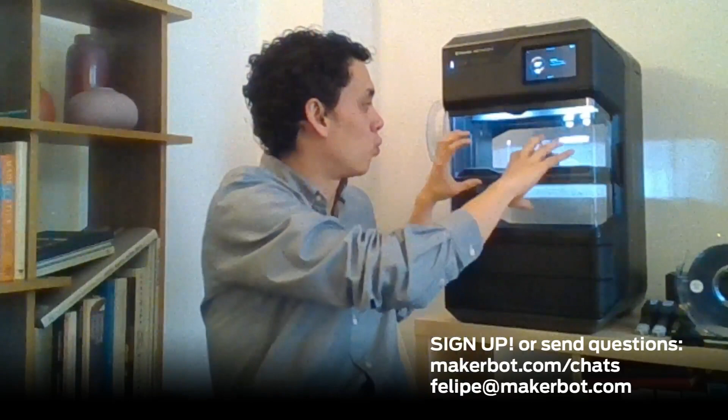It's important to know that even if you have a heated build plate, if you don't have a heated chamber, it's going to be hard to print with some of these higher temperature materials because they will start peeling up even after. With a heated build plate, once you get a certain distance away from it, you start losing that benefit. And with the chamber, you're actually controlling the whole print environment, right? So I'm not only focusing the temperature here, but I'm able to print with a consistent temperature in every single layer, not just the first couple of them.

So for PCABS, the print settings are as follows, right? You will need to have 85 degrees in the print chamber, so hence you need the Method X to print that. And it's going to use SR30 as support. So here I have another part. It's actually a car door handle. This was printed horizontally like that. And as you can see, both the raft and the supports. The supports are, as you guys know, the structure that's created to support, hence the name, the actual print structure, right?

So we have PCABS and PCABS FR. Let me jump here into a new slide. Both will use SR30 as supports, right? It's going to be available right now only in black. But it's a really interesting material, right? We've heard that it's being used a lot for automotive industries.

That's why some of the sample parts that we have, let me move to the side a little bit, are basically that, right? In this case, the car handle. I also have right here a halfway printed train car holder. So in Europe, they use this a lot as replacement parts.

So directly to replace, instead of having a small batch of these, like the hand holders that you get grabbing to the subway, not so much nowadays, but when you're trying to replace some of those components in the transportation industry, it's really hard. It can be really expensive to submit an order. So let's say that you're trying to replace 5 or 10, it's just better to print a few as opposed to having to put an order for 100 or 1,000 pieces.

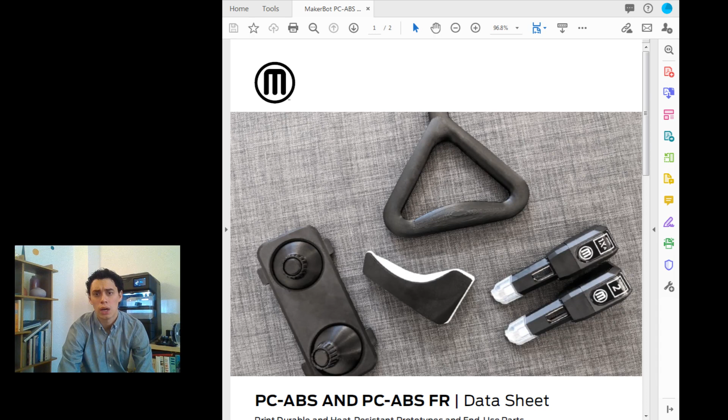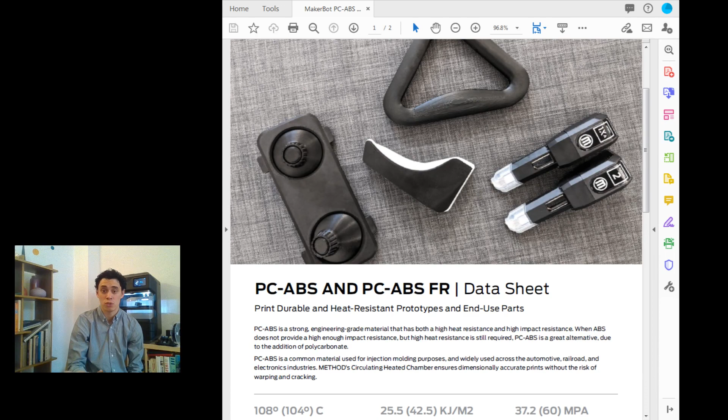So PCABS and PCABS-FR. FR stands for flame retardant. That's one of the reasons why it's widely used. It's widely used in the automotive industry and also in many train and railroad applications because of the compliance that they need. When they are substituting any one of these components, they need to make sure that if anything happens to them, they will withstand a certain temperature, or worst case scenario, they will not emit particularly harsh fumes if they are ignited.

So overall, the withstanding temperature starts at 100 degrees C. That's pretty hot. That's one of the reasons also why you need to have the chamber temperature so high up. So as I said before, you need to print it at 85 C, which is pretty darn hot. It's almost boiling temperature, right? It's pretty strong. I think it's fairly comparable to ABS.

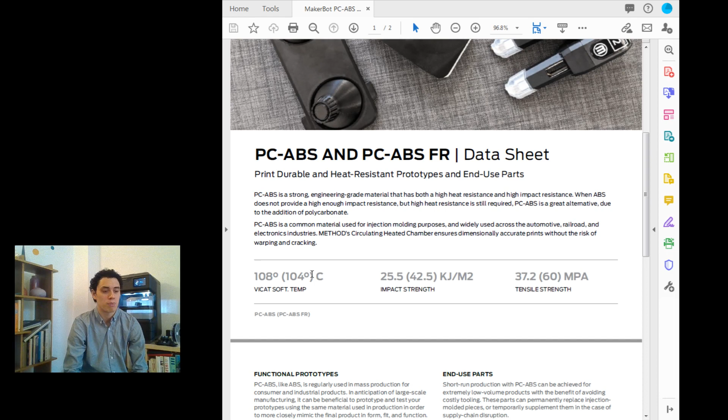And specifically regarding the applications, we've seen it used a lot for functional prototypes. We know other manufacturers that actually supply these. Also as end-use parts, kind of what I was showcasing here with the train handle, where you are going to swap one-to-one the part that's defective or the part that broke down. Let's say that you have this handle in a subway car, and then you just print a new one because the old one broke down, wore off, or whatever.

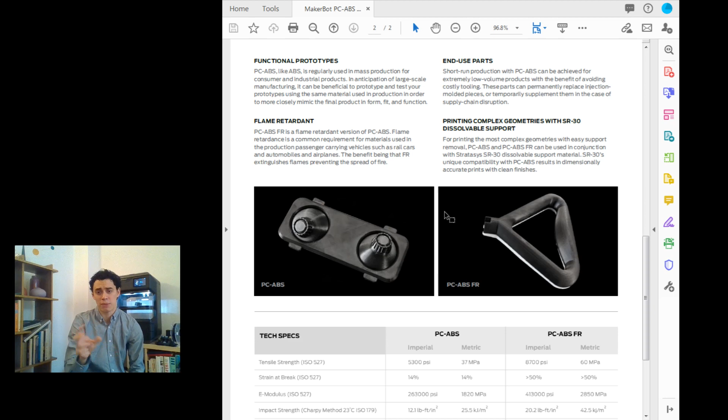One of the versions is flame retardant, which is just to say that it'll both prevent the spread of fire and comply with certain guidances that we have, depending on where you live, that might change. So we can look at that in detail in a second. And it's also able to print fairly complex geometry, specifically using SR30. I'll get to that in a second.

But I was talking about these specific parts. So the part on the right, this handle, no matter how you print it, you will need supports, right? And some of these more advanced materials won't print with any other support.

So you might end up needing to use breakaway supports if you don't have a dual filament system. With Method, you're able to use SR30, which is great because once it's done, that white outline, I don't know if you can see it here. Yeah, you can see my mouse. So this white outline is going to basically get dissolved, which is what happened in this part,

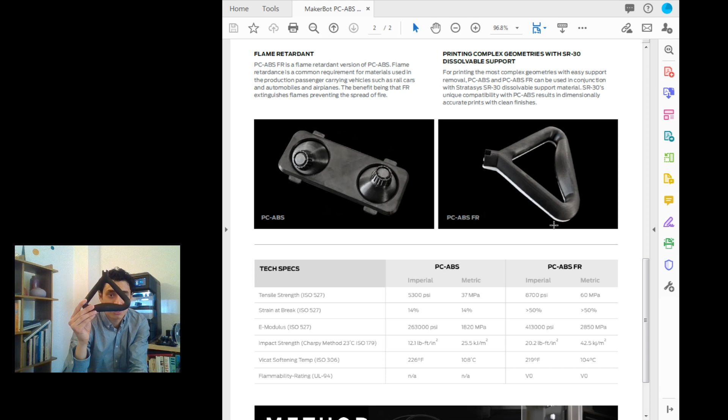after the printing process is done, right? So you're able to print the part in any orientation, depending on whether you're optimizing for a specific strength or a specific layer alignment, have the supports be generated, and after the fact, just remove the supports and get your finished part without any hassle, really.

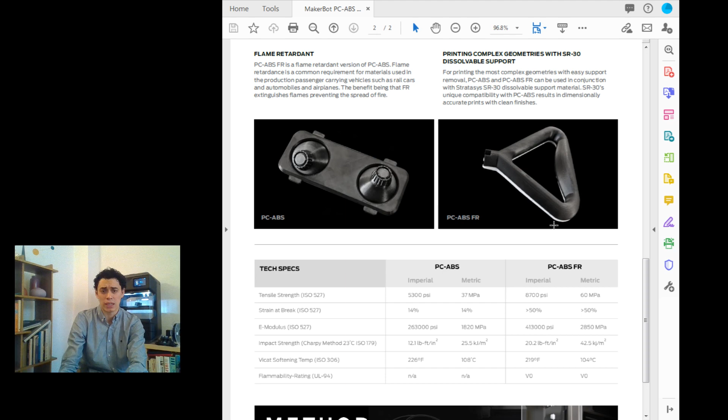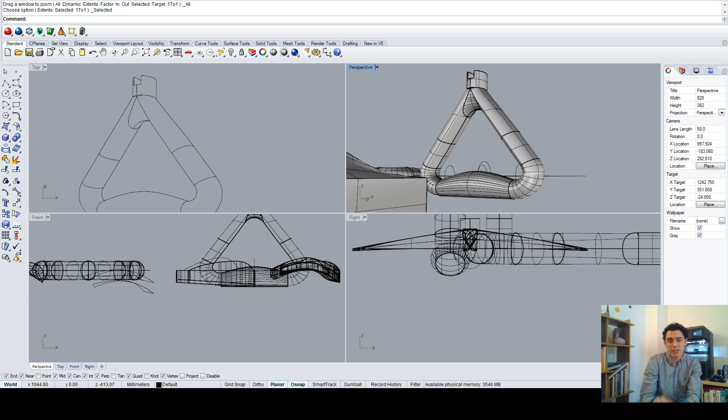My Rhino window. I love Rhino. Some people call me old school because of that. I generally use either Rhino or SolidWorks. I'm also well versed in other Autodesk features and materials. But for this one, I chose to use Rhino, and specifically, let me expand this. So this is how I generated this specific train card holder, right?

It's a very smooth surface, so let me just focus in here. Everything is rounded off, which means that no matter how you orient this part, it's always going to require supports, right? You can either orient it vertically, or you can orient it horizontally, which is the way that I've been printing it so far. And the thing that is going to change with your part orientation is mainly the layer lines, and in some geometries, it can affect the performance of the part, right?

We'll talk about that in future episodes, but just how do layer lines correlate with part strength? The nature of 3D printing creates, I think it's called anisotropic materials, which means they don't necessarily have the same strength in every single axis. It's way stronger when you have the heated chamber, right? Because it actually allows for that change in strength on the vertical axis to dissipate because you're constantly heating up the material, but it will definitely change the way that the material performs depending on the part orientation.

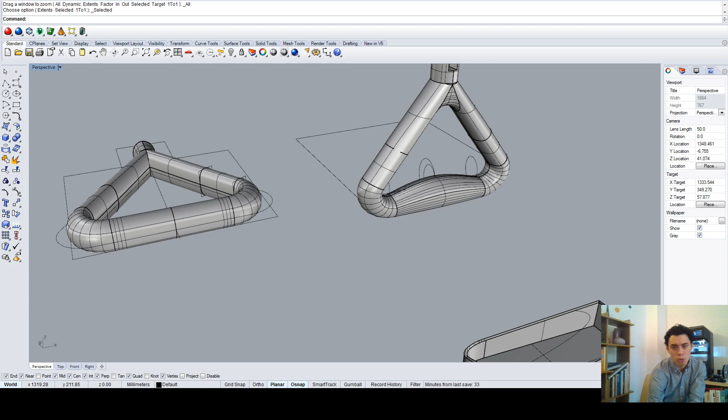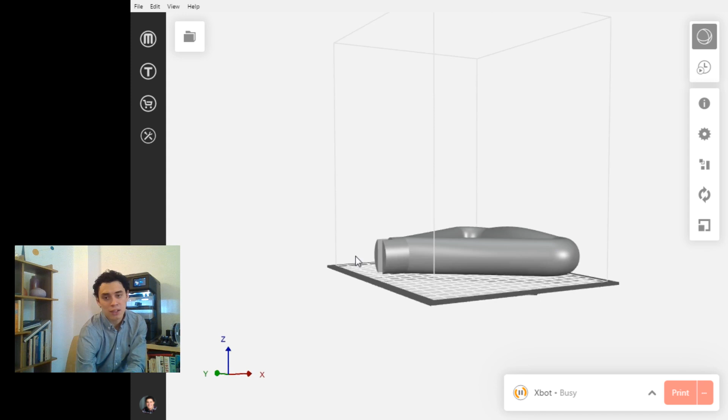So let's say that you're done with this part, right? You've already finished smoothing it out. You see how it's already looking pretty legit, pretty straightforward of a part. Then the next step would be to actually export and bring it over to MakerBot Print. We have many plugins available for you guys to use, whether you're using SolidWorks or Autodesk Fusion 360, that will directly send the part over to MakerBot Print. And once you have it in MakerBot Print, you can do a similar exercise to what we just did in Rhino, right? So it's a very straightforward process.

In this case, let me change this for a second. So I'm going to select a different printer because the one that I'm currently using here is busy. But I've got a different Method X, right? And the first thing that you will notice is that there's a little square floating around the part itself. That square is what we call the purge tower. The purge tower is the material that's going to be deposited as an extra element for the part in order for the nozzles to clean themselves up, right?

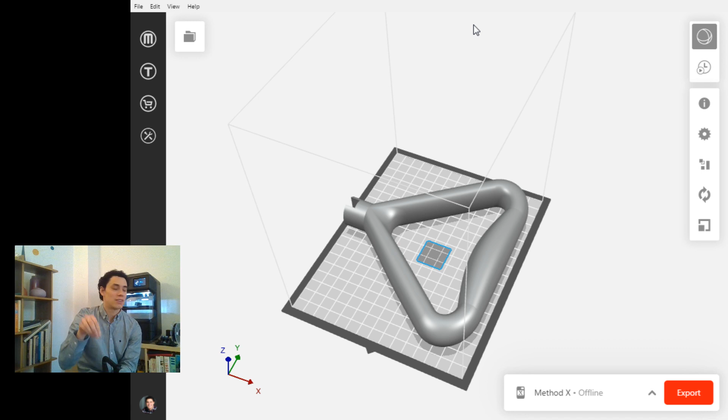So when you're printing with two different materials, you need to swap between nozzle 1 and nozzle 2 constantly. In order to avoid any sort of stringing, any sort of defects with the part, the machine itself is going to print a little tower close to that part in order to clean itself. It's kind of like a purging area that it'll visit every time that it toggles between nozzles in order to avoid any sort of contamination between the two materials.

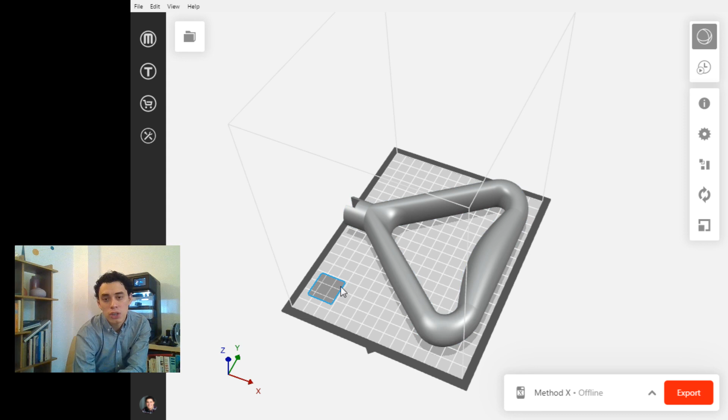So that part, that little square represents that purge tower. You can move it around and orient it any way you want. And as I was saying, the part is also something that you can change and orient in any way you want, right? It could be a vertical orientation. It could be a horizontal orientation like what we have.

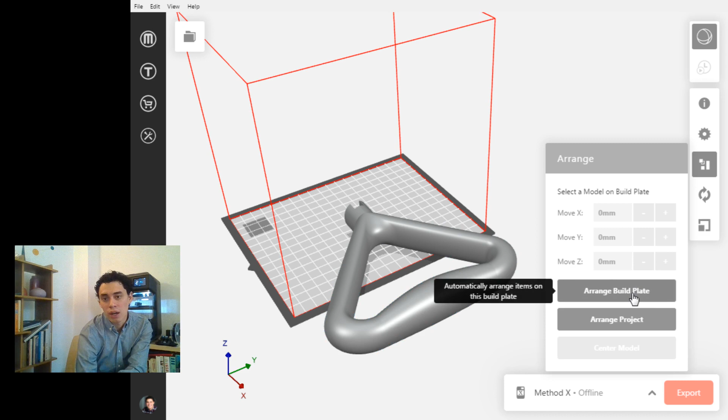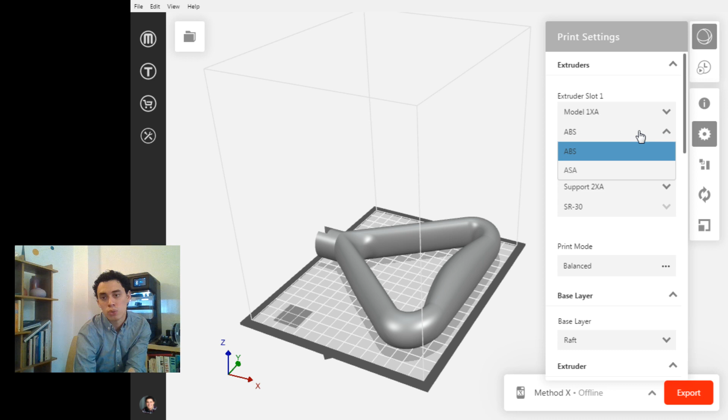It's also easy: here I can go and arrange build plate and it'll automatically fit the part to the build plate and make sure that it actually is aligned to the best orientation that I might want to use. And then you can either directly export the part if you're ready, or visit the settings. Right now I have only ABS and SR30 here. So you just change the material here to be ASA, and in this case, that will require SR30 support, so there's nothing to do there.

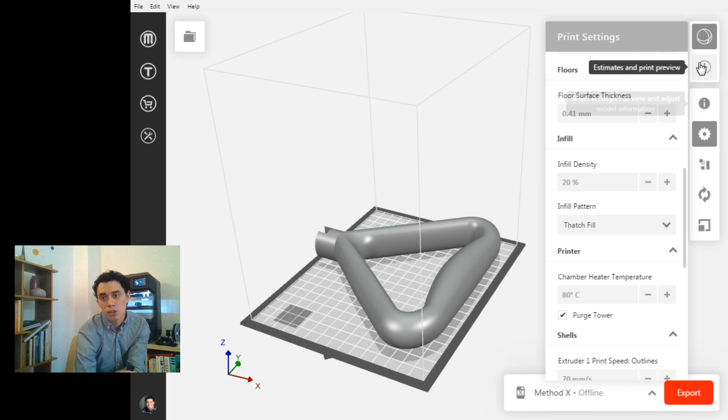Change the print mode, maybe select whether you want a raft or not, the different temperature settings, which as I said before, as soon as you select PC-ABS, this will default to 80C, and you can directly export that file, or the better way to do it, I would say, is to get a preview. Why would you want to get a preview? Because that can actually change or challenge a little bit your part orientation.

So what MakerBot Print is doing right now is actually generating the whole tool pathing document, so the slices, right, that this file is going to be split into, in order for me to know how this part is going to look, how the supports are going to be generated.

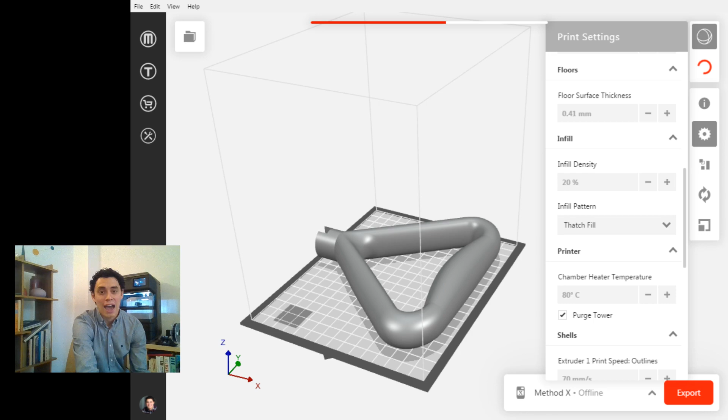I'll let it finish for a second, and in the meantime, I'll show you guys this part, already printed out. So I stopped the part halfway through, just to show you guys the infill settings that we're using. In this case, it's 20% infill with this linear lattice, very straightforward. And the part, as I was mentioning, was printed this way.

So once I finished printing, I actually just removed the supports down here, because as you can see, there's really no flat edge in the part, right? Because of this little bulge here, this rounded element, it's impossible for the part to sit flat against the surface. So because of that, I forced myself into having to use supports, right? Which is good and bad, right? In a way, you could design your way out of it. You could design a part that doesn't require supports.

For example, I have this other part. This is also polycarbonate. It's not ABS. It's just regular polycarbonate from Polymaker. The material is called PolyMax. But this part is just a little bracket that I printed out to hang stuff around in the house. So this goes against the door, and I can hang stuff.

But anyways, by designing a flat extruded part, even though it has these rounded elements, even though it has multiple geometries associated to it, I can print it without supports. And why would you do that? Well, basically you can save time, you can save a little bit of post-processing time, but with the soluble supports, you don't necessarily have to compromise on that, right? You can just print it with supports, and going back to this support generation animation, it's what's happening right now, right?

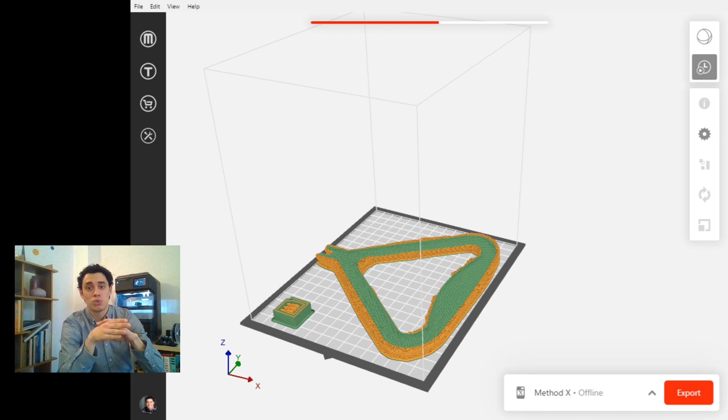So what you see happening here is MakerBot Print is detecting the areas that will need support. Those are highlighted in yellow or that orange color. And the green parts are the actual parts that will have the regular material, so in this case, the PC-ABS material that we will be printing with. Let's see if it finishes, but you can see how it slowly generates every single layer, and also gives you a preview of what's going to happen.

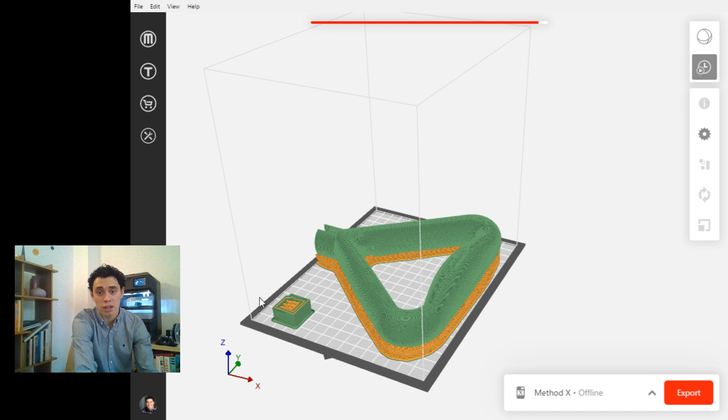You can see what I was talking about before here in the lower left, where it's generating that purge tower, right? And the purge tower, as you can see, also has two colors. So it's done. It's a 10-hour part, not too bad, ten and a half hours.

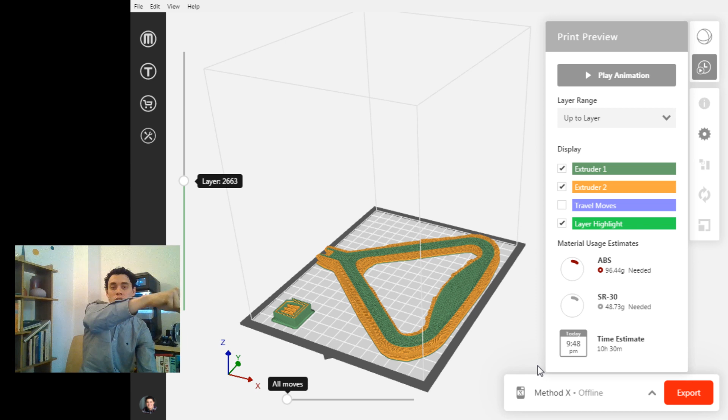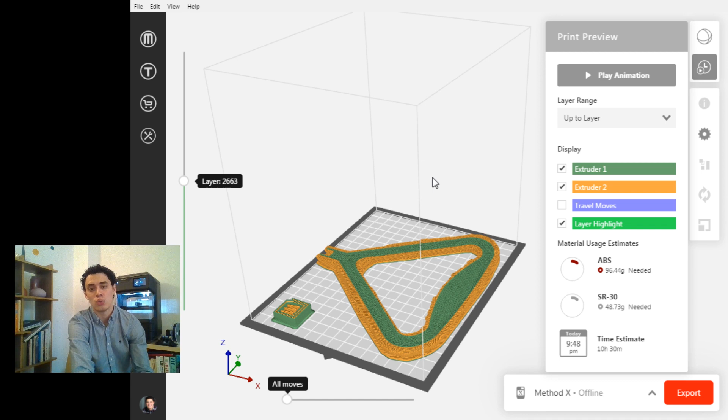Now you can also change the location of the purge tower, and that might affect the print time. Why? Because the nozzles will have to travel every single time to that purge tower in order to clean themselves up, right? So if you put it in a more central space, which is the way that I actually originally printed it out, if you put the tower here in the center, you're going to be able to simplify it a lot for the machine, because then it doesn't need to travel all the way to the outermost corner to clean itself up and then return to the model, right?

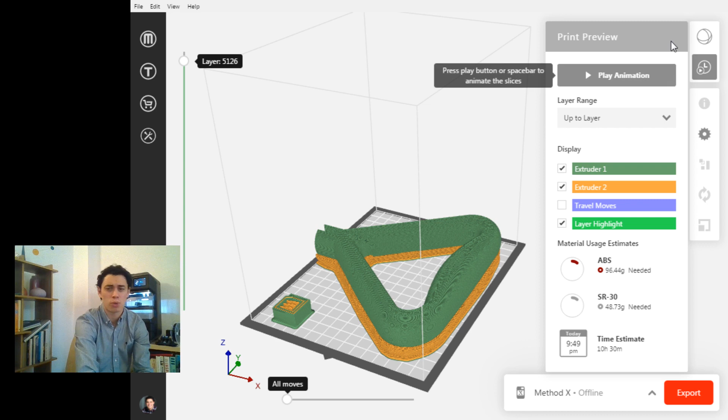And here, I just really like this toggle view where I can see layer by layer what the actual process is going to look like, if there are any issues with my part. Sometimes you have either issues with the mesh, or maybe you're seeing supports in an area where you didn't expect support. So this preview is a great way for you to look into that and have a first idea of how the part is going to be printed out.

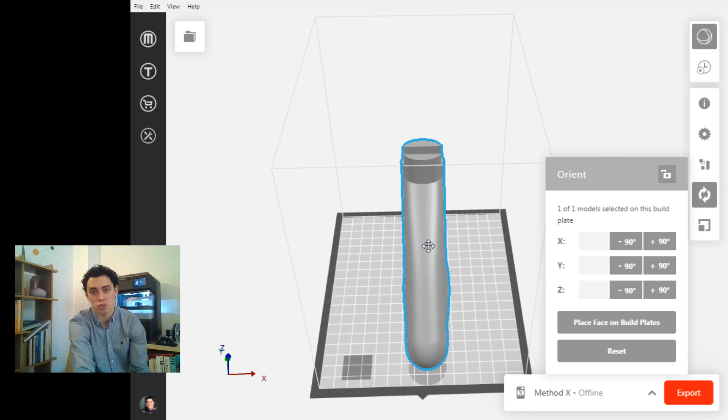And just for fun, while we talk about some other parts, I will change the orientation of this part and make it vertical. So just keep in mind, for the flat orientation, this part was going to take 10 hours to print. Let's compare that, let me arrange the build plate, and let's compare that with how much time it will take to print it vertically. Again, you can do it either way. You have both options, so I'll let it run for a few minutes.

But what we should expect, let me fade back here, now that I'm trying to print the part vertically, is that it's going to generate supports in all of this area. So most of this triangle is going to be filled up with supports. This is not ideal. It all depends on what you're trying to do, and you could always ask, would you want to print it this way or that way?

Strength-wise, it's going to be a similar result, but the differences in supports are going to be quite noticeable, because if I printed it this way, you can imagine how I will need to generate supports all the way through on the outside and also all the way through on the inside, because I have this large overhang here.

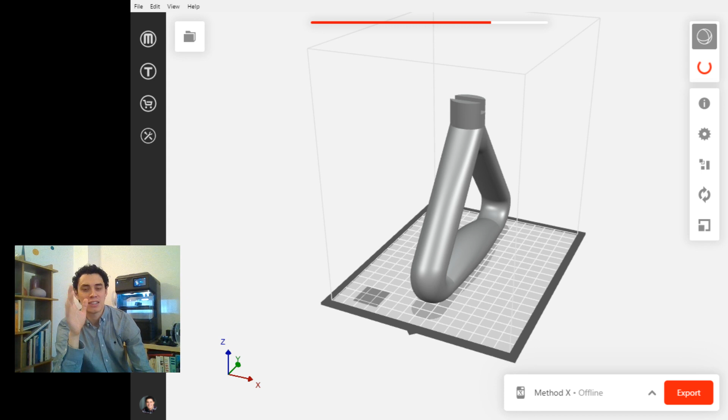So MakerBot Print is right now estimating the print time, the support needed and the material needed for this specific orientation. If I had to bet, this is probably going to be around 18 hours. But let's see. So flat, 10 hours, vertical, we'll come back to it in a second. In the meantime, let's talk a little bit more about some other parts that I have here.

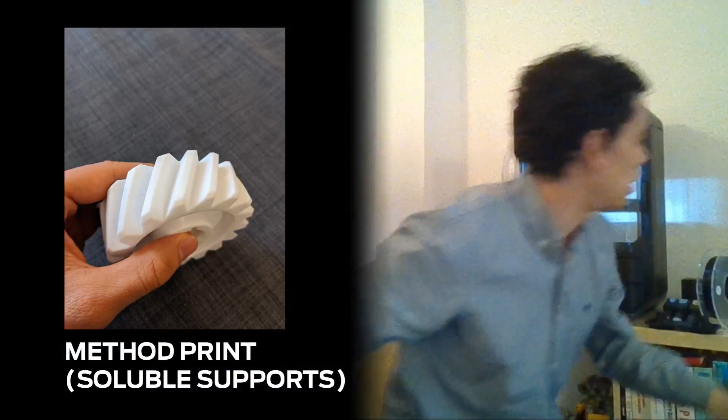So in this case, where did I leave that? It's right here. Another polycarbonate part that I printed before. We talked about this one last session, and it's a really interesting one because of the same need for strength. For this part, the same idea applies. Why would you print it vertically versus flat? If you print it flat, you require almost no support, unless you print it with this hollow area facing down.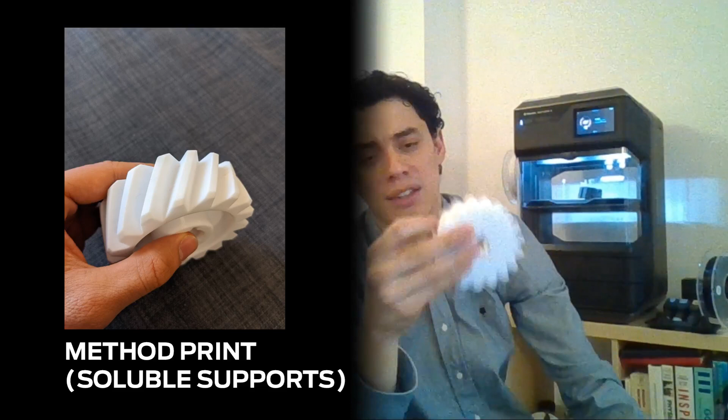But again, I think the big takeaway is that you have to consider two things as you're preparing your files to be printed out, the rule of thumb. What's the strength requirement? What's going to be the best orientation for your part to give you the best strength? And second, the time. Which orientation will generate more or less supports? And that's going to change quite a bit depending on the part, your expectations, and whether you have specific requirements in how the part is going to perform and behave.

So if I go back to this other polycarbonate part, this fan, let me just fade back to my webcam here. If I printed this part horizontally like that, facing sideways, two things would happen. First of all, I would get a lot of support generated, as opposed to when I printed it this way. When I printed it this way, it just generated support in the first couple of layers, basically just this section, and that was it. The whole top part sort of stands on itself.

If I print it sideways, all of this will require supports. Most of the fins, if you look face on, will require supports throughout. And not only that, but it'll also create layer lines in this direction, which is perpendicular to the forces that are going to be applied to this part.

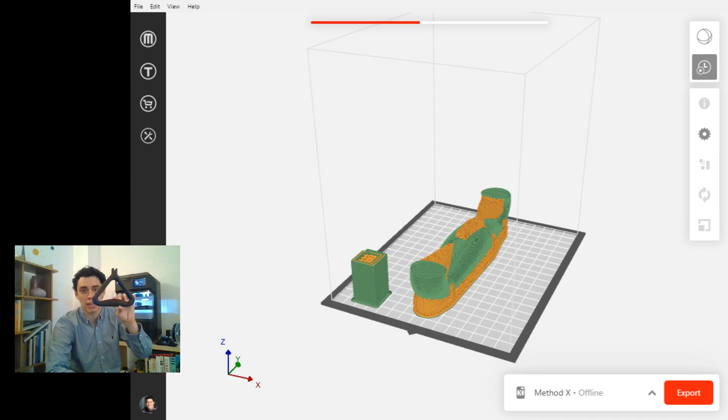So it's just something to keep in mind. Part orientation, very important for two reasons: material usage and part strength. Going back to, let's just see how MakerBot Print is doing. You can see how it's slowly starting to generate the support structure. And again, we are printing this train holder vertically, just trying to compare: is it a lot longer than regular horizontal orientation, or is it going to be a little bit faster?

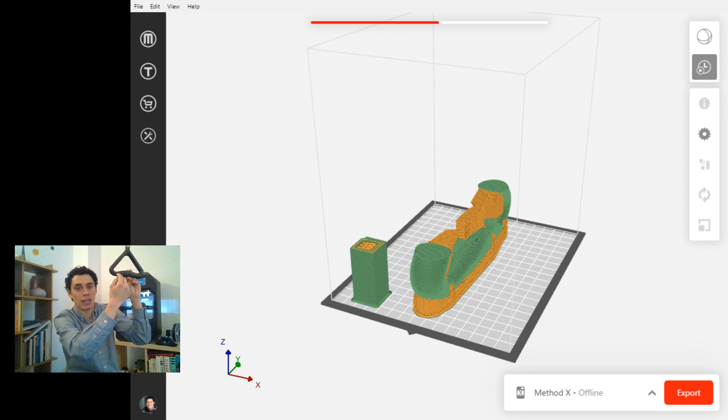I don't think so. It's going to require quite a bit more supports. You can already see how it's generating supports. Let me put this here in all of the internal area, because all of this triangle now needs to be supported, right? It cannot just print in thin air. With 3D printing, you always need to have some sort of material to print up against. So as you're creating these new layers, you need the scaffolding to support those new layers.

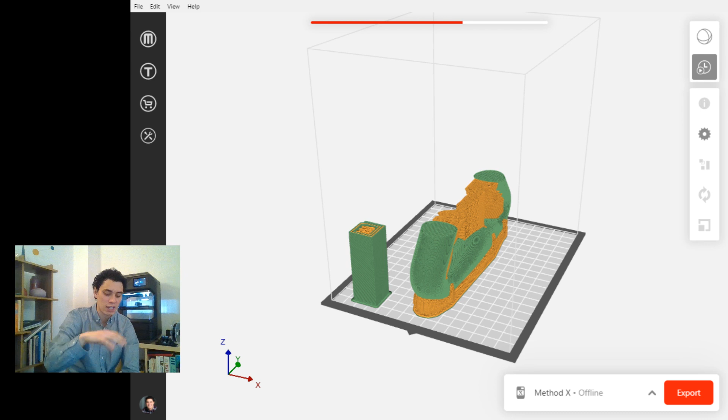But yeah, let me know so far if you have questions. I can see already some of the questions coming in. Is it risky to print so close to the edges of the build volume? Not really. Actually, there's already a buffer zone in Method that accounts for that, right? It's actually really straightforward, but the printer will never damage itself. The parts themselves will not be affected if you get too close to the edges of the build volume.

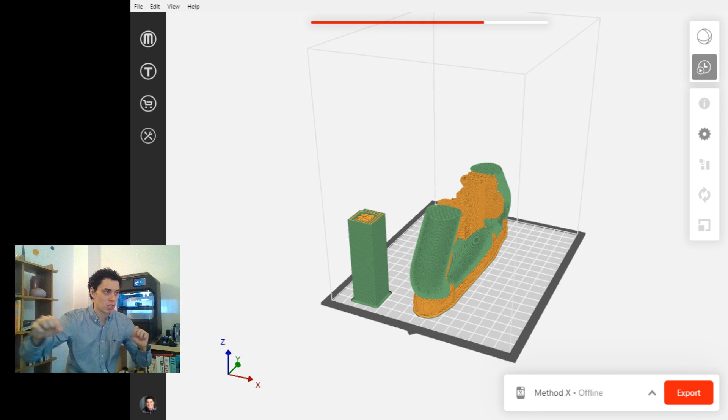The whole idea is that with a heated chamber, and that's one other thing that you have to keep in mind if you're not using a heated chamber system. With a heated chamber, all of the build volume is controlled, not just certain parts. And we see it happening a lot with just heated build plates or sometimes with just regular build plates, right? With the Rep Plus, if you start printing too close to the edges, you can start to see some curling happening in the print. With Method, that's just not the case because the whole volume is going to be controlled, and the printer is meant to actually reach out all the way to the edges and basically print successfully every single time.

Can I print without supports and use only model material? Oh, you're getting a new Method. Congrats. That's super exciting. You should see episode, I think it was episode 2, when we did the unboxing of this guy. It's a super straightforward process. If I were you, I would just document it because it's kind of a fun one.

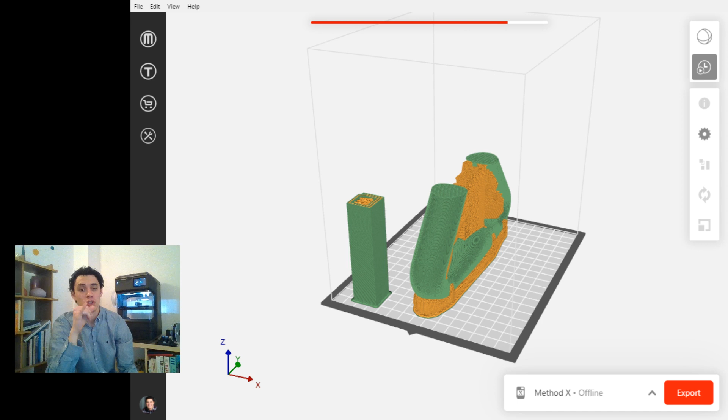Yes, you can print without support. Well, okay, you cannot print without supports, but you can print with a single material. And what I mean by that is that it's possible for MakerBot Print to generate supports out of the same material that you're using for your model material. We call them breakaway supports. So instead of having to dissolve them afterwards, you would need to peel them off with a plier or a little spatula in order to get rid of them.

I'm not sure if I have any good examples. Oh, no. I don't currently have any examples of breakaway supports right here. But the answer is yes. You can print with a single material, not without supports, because without supports, well, the part is just going to fall off. But you can print with breakaway support. So you just go to MakerBot Print, select breakaway supports, and there's that, right? So you're printing with a single material.

I have another interesting print. This one is ABS. I want to maybe at some point just do one chat for funsies on these weird structures. I like to play with Grasshopper a lot, I don't know if you guys are familiar with it, in Rhino. And it's kind of interesting because it's a great way to push the limits of 3D printing, right? You are able to generate these very complex surfaces. In this case, it was just a random project that I had, just messing around with the printer, and I wanted to see how hard it would be to print very complex parts with a Method.

And you can see how delicate this part is, and how clean it came out. This is ABS, and it's using SR-30 as supports. And after the supports are gone, the part is just, you know, gorgeous to look at. There's no real specific application for this one. Just an interesting thought experiment, but I thought I would bring it up.

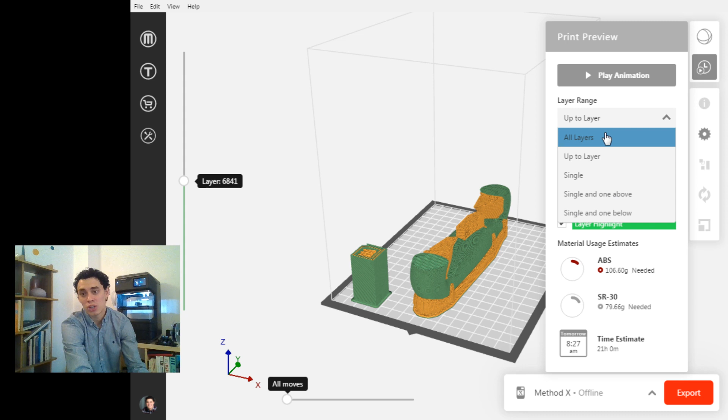Extruder 2 represents the support material, and then you can have a layer highlight just to know how high up in the model you're at. You can also select here all layers. I want to see all layers at once. Let's toggle to that. Here we go. And you can immediately see why there's such an extended print time happening here.

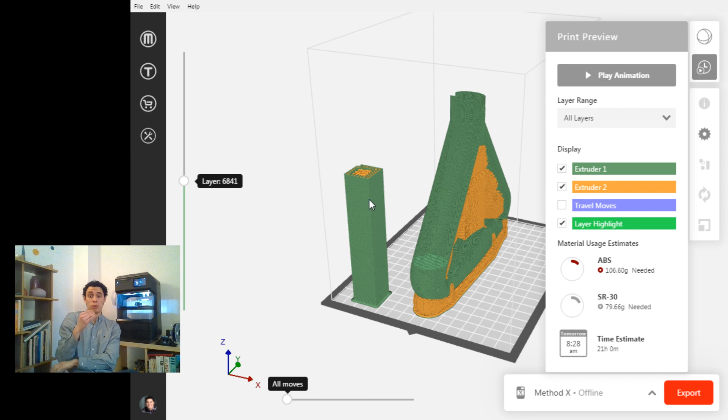Not only are the supports required throughout the part, so all of the internal structure of the model now requires supports, but also the purge tower, and that's one thing that you have to consider, right? The purge tower is going to go not as high as your model, but as high as the last layer of support material that you have, right? It's going to accompany that support generation, so to keep constantly cleaning the nozzles.

And the importance of that is, well, you really want the nozzles to not contaminate each other because you don't want soluble supports inside of your part, which is why the toggling happens, right? It goes out, it cleans itself. You can disable this feature, of course. I've done it, and it's not super risky, but again, if you're trying to do something legit and serious, I would say just keep it there. It's just going to give you so much peace of mind having the nozzles cleaned every time, and it creates parts that are plain and simple, clean, solid, sturdy, and they work.

So 21 hours versus the 10 hours 30, it's quite a change, right? Quite a dramatic change, and you can see the reasons why. The part orientation is going to affect not only the material use, you're also using more material. So this is 80 grams of SR30, I think, and the other one was like 20 grams. I'm not sure, but it's way less than that, right?

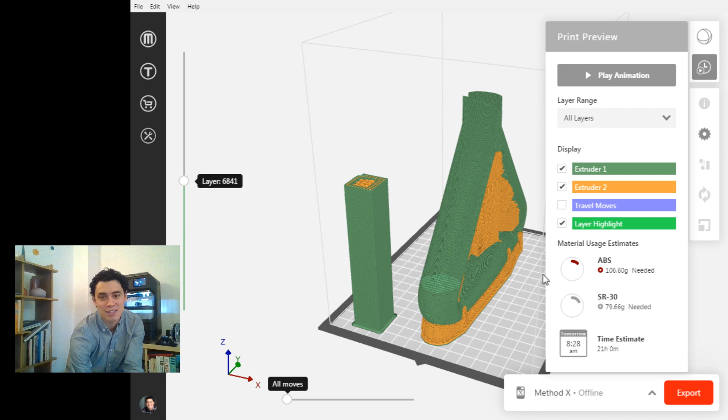So another thing to consider when you're exporting your file, when you're preparing your file, is precisely that. Part orientation will affect mainly two things: part strength and material usage. Whether that be just because of the material for support, or also the model material can change the way that it actually behaves.